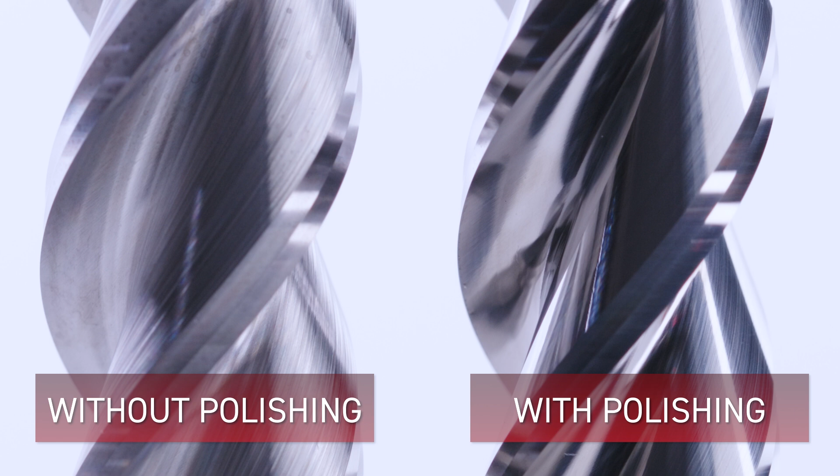Today we'll be looking at flute and OD polish grinding on carbide cutting tools and demonstrating how to polish these tools on an Anca tool and cutter grinder. The difference between an average cut and a perfect cut often comes down to the edge quality and surface finish of the cutting tool. That's where OD and flute polish grinding comes in.

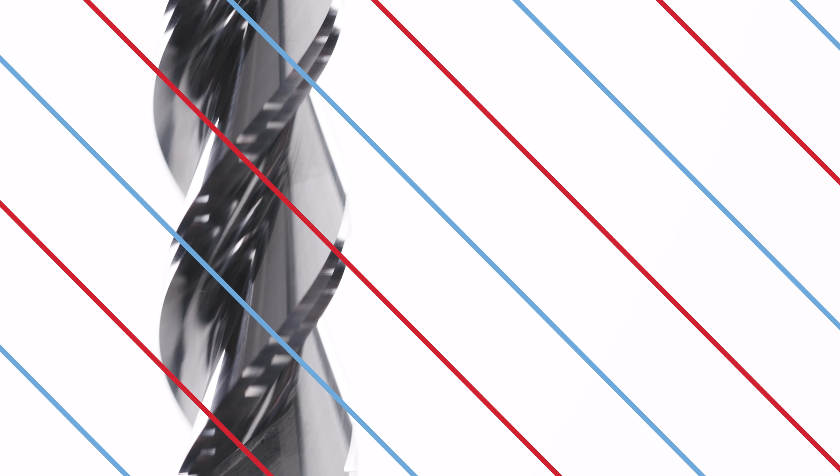Polish grinding enhances the cutting tool performance by refining the surface finish. This reduces friction and improves chip evacuation. This means less heat, a longer tool life, and a better finish on the workpiece. The reduction in heat and friction allows for higher cutting speeds and feed rates without shortening the life of the cutting tool.

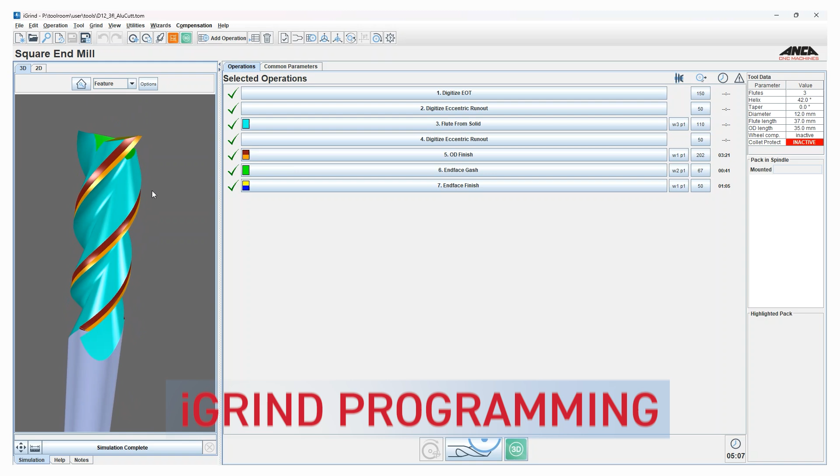Polishing also reduces the built-up edge effect, where the workpiece material welds itself to the cutting tool, causing poor cuts and wearing. Let's take a look at how to configure the polish grinding operations in iGrind. You can see here we have the original end mill before any polishing operations are added.

If we take a look at the flute from solid operation, we've got inputs to control the major flute features like hook angle and core diameter. We've also got our grinding wheel selection where we've selected our 1A1 wheel to remove most of the stock, leaving a small amount for polishing. From the Add Operation box, we'll add a flute polish operation to our list.

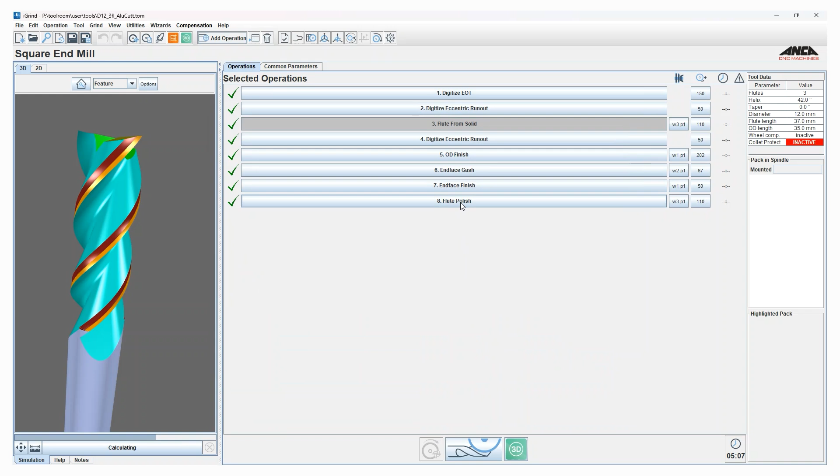After adding the operation, we'll firstly assign the polish grinding wheel to the operation, and we'll set the cutting speed for the wheel at 25 meters a second. We can see in the cross-section dialog that the flute shape we're generating with the 1V1 polishing wheel is different to the flute shape ground by our 1A1 when we initially grind the flute. We can also see this in the 3D simulation.

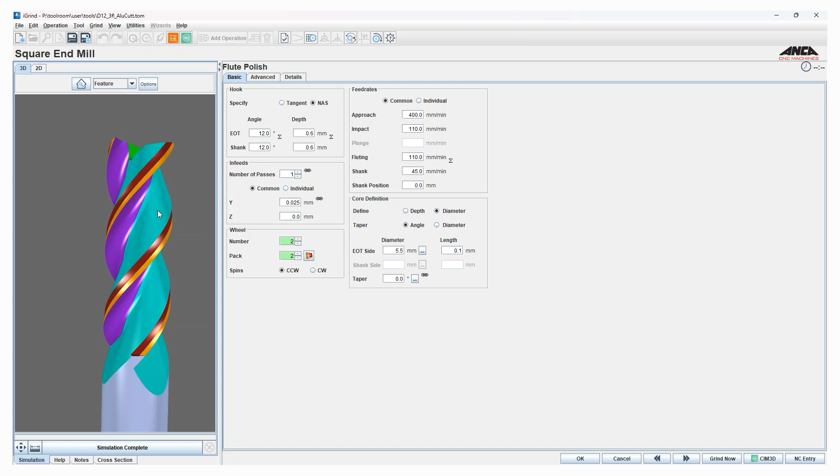To allow us to polish the entire flute surface, we're going to edit the wheel clearance angle to achieve a similar shape to what we've got with the 1A1 wheel.

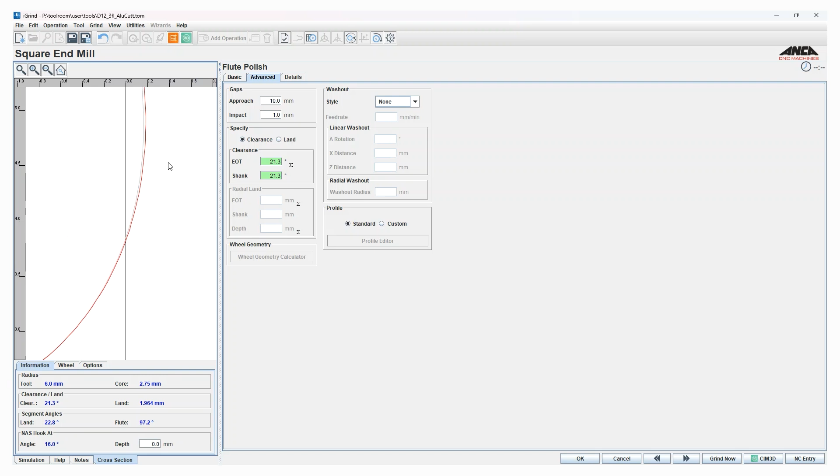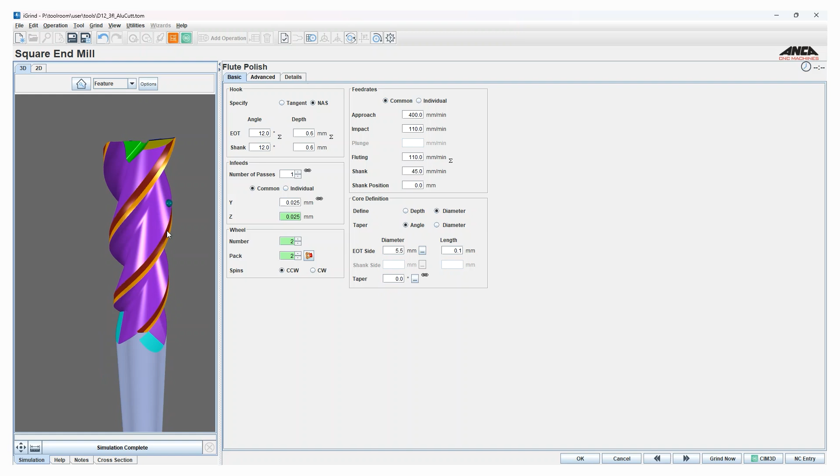We're also going to add a small amount of Z infeed, so we're removing 25 microns of stock with the polishing wheel towards the flute face and towards the tool center. Now you can see from the color mapping in the simulation that the flute polish is going over the entirety of the rough flute surface.

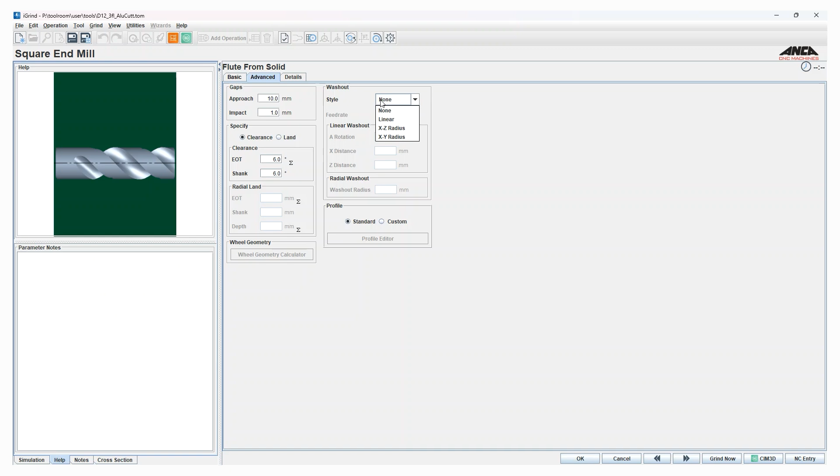For the washout section of the flute, what we can do to avoid putting a heavy load on the polishing wheel is to extend the washout in the flute from solid operation. This just saves our polishing wheel from experiencing any higher grinding load and wearing prematurely. Lastly, we'll set the grinding parameters for our flute polish operation.

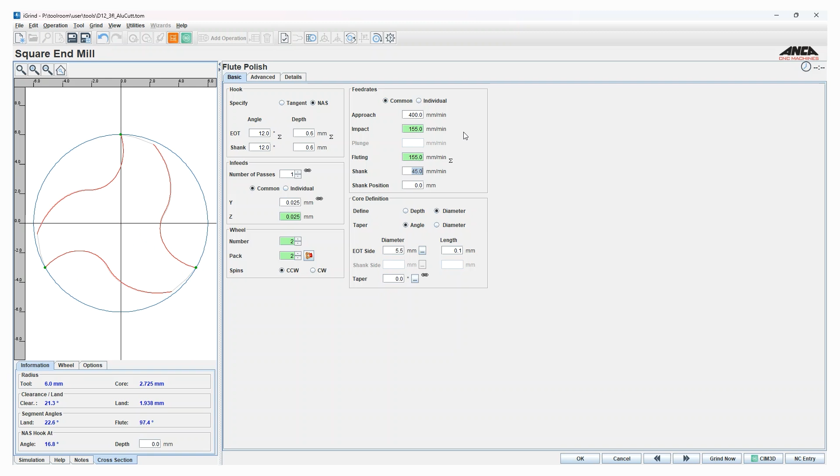To add polishing to the outside diameter of the cutter, we'll enter the OD finish operation and add spark out passes to both the first and second reliefs. We can select the polish grinding cup wheel for both relief spark out passes.

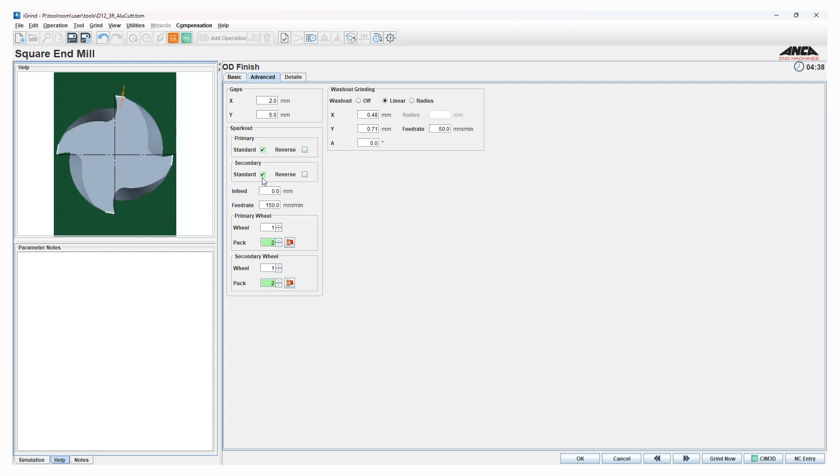Importantly, if we add an infeed amount to the spark out passes, the final diameter size we've programmed in the common parameters will be respected and maintained. So we'll add an infeed of 15 microns for the spark out.

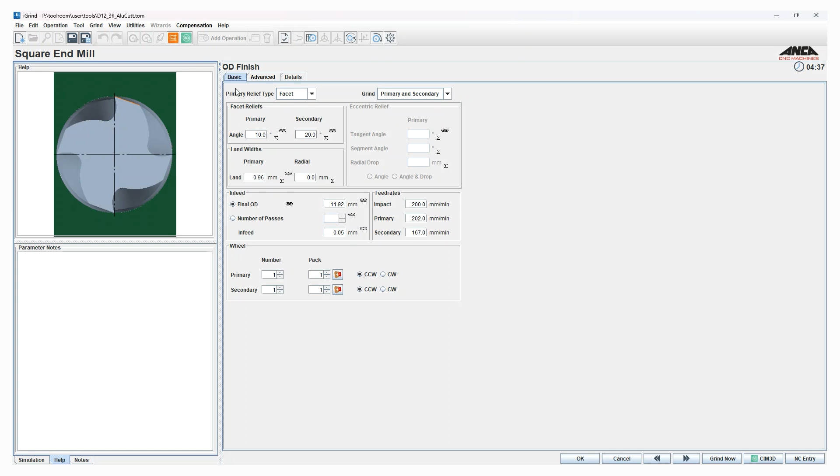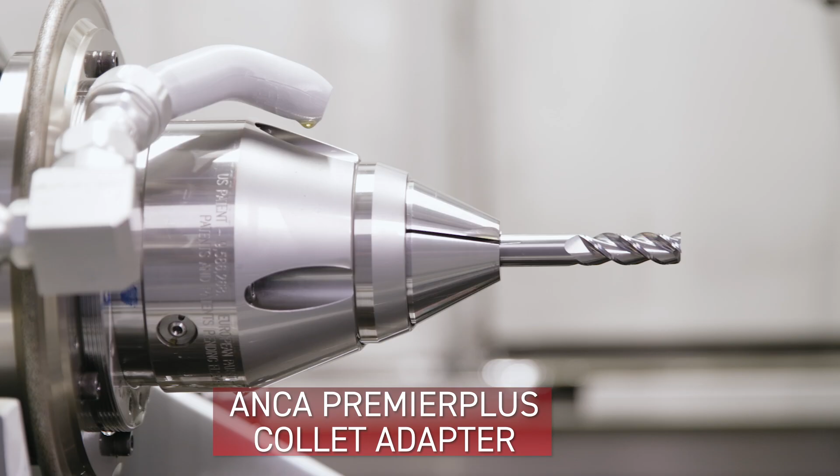Today we'll be working on the TX Linear, although this application is also suitable for other tool and cutter grinders such as the FX and MX series machines. The TX Linear features a 2-station wheel changer, which we have set up with some nice grinding wheels from Tyrolit. The work holding on the machine is the Anca Premier Plus collet adapter with a B3245 Schaublin collet.

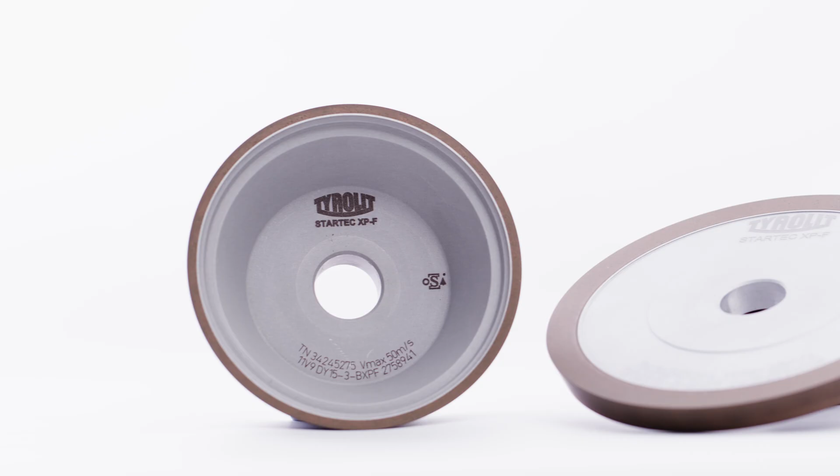The cutter we'll be grinding is a 12mm diameter 3-flute carbide end mill, something that you might use for machining aluminium. For polish grinding carbide tools, resin bonded diamond grinding wheels are the best choice. Resin bonds provide a soft, controlled grind, reducing surface roughness and preventing microchipping on the cutting edge. The grinding wheels should have small diamond grits from D5 to D20.

We'll be using the Tyrolit XP-F series grinding wheels with grit size D15. These wheels have a resin bond system with good wear resistance and shape retention. The wheels can remove up to 0.2mm depth of cut. Today we'll be polishing around 50 microns of stock from the cutter. The main stock removal is being done by the first wheel pack.

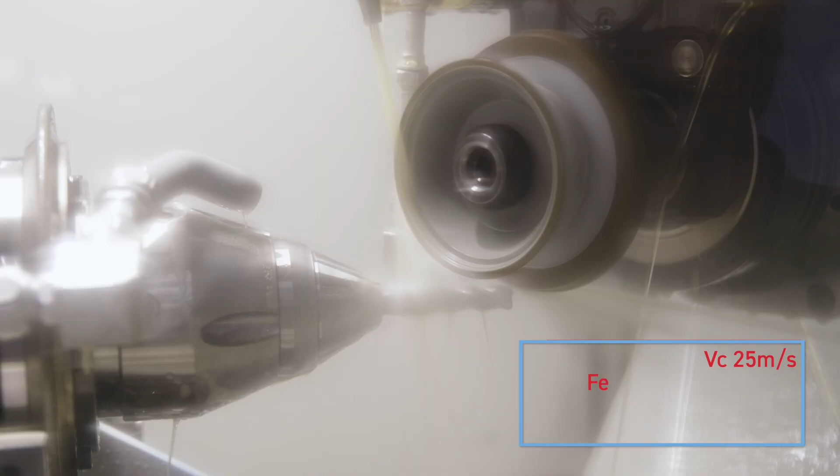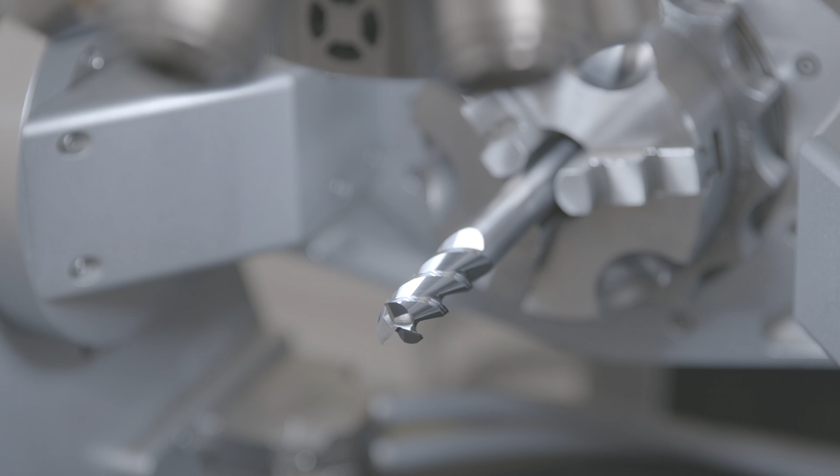To measure the surface of the tool, we'll jump onto the Alicona 3D measuring machine. We'll be able to scan the surface and measure the roughness in the flute. We can see that we've achieved just over 0.1 micron Ra, which is looking pretty good.

So to wrap things up, polished carbide tools offer greater performance to the end user. With a simple setup on an Anca tool and cutter grinder, we can easily achieve a high quality surface with consistent results.